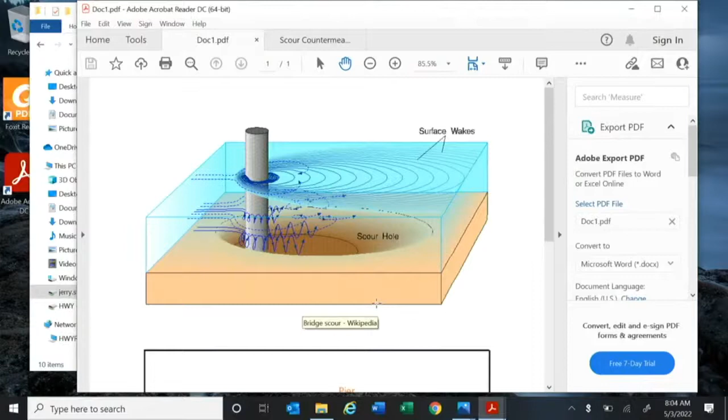Here's a picture of what we consider scour. When we get heavy rains like last night, certain bridges, depending on the soil underneath, when water hits the piers it causes a scour hole. Over time that scour hole gets deeper and deeper, and pretty soon it could actually undermine the bridge. These projects will put riprap all the way around the pier and the abutments to prevent the scour.

I'll show you some pictures here, first the piers. This project has 4 piers, and we're going to riprap probably 10 foot all the way around each pier to protect it, about 3 foot deep. We'll also riprap going up towards the abutments, this column right here, to protect the slopes because there's a lot of erosion happening there.

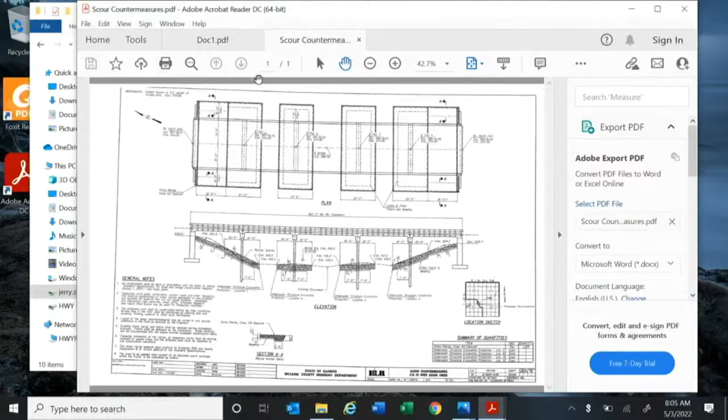Here's some other pictures - this one is from Martin Township.

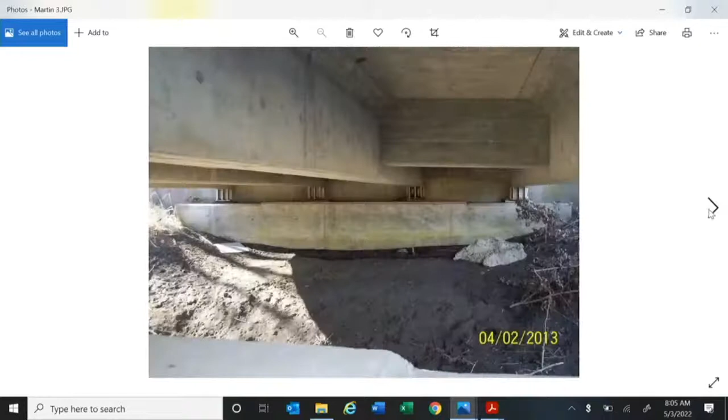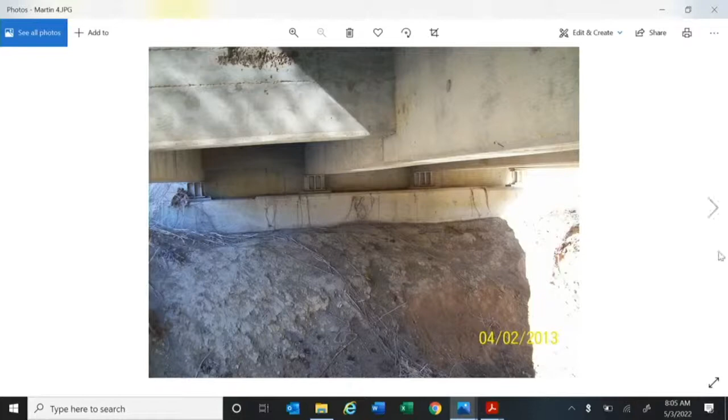So you can see right here, this is where the scour's occurring, behind the abutment and in front. You can kind of see there's scouring on the bank itself, though we're not doing anything with the bank. You can see underneath the abutments it's starting to erode away, and here where this has all been basically cut off. So pretty soon there's not going to be anything left there.

But with the Rebuild Illinois funds, these two townships wanted to use their funds to put these scour countermeasures in place and prevent anything from happening to the bridge itself.

So there's just another picture. This first one was in Martin Township, a little bit north of Colfax. This one here is what they call the Moores Mill Bridge, which is down near McLean. Down that area with Sugar Creek, it's a lot of sandy soils, and that's where we have a lot of issues with scour. We did a bridge on County Highway 59 between Stanford and McLean, upstream from this structure, I want to say around 2010, and we put riprap and scour countermeasures in at that time.

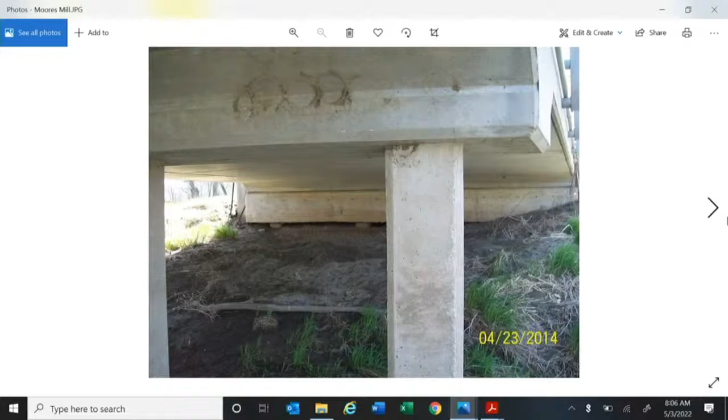And you can see what else causes it. Here's where we have debris that piles up. So the idea is if we get that riprap outside of the piers, then that debris won't build up near as bad as what we're seeing in these pictures here. This was after last year's flood event, I think in June.

So anyway, this is what we're actually approving today: the petitions for the two projects with the townships. These are going to be 50-50 projects, and we're estimating about $200,000 a piece. The road commissioners are going to use most of the Rebuild Illinois funds to pay for their half of the project, and then we'll use our county bridge funds to pay for the other half.

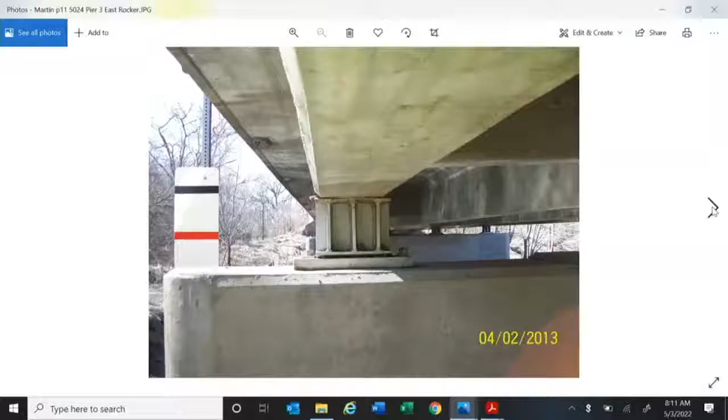I think this one has no date. I just know it was after the flood of last year because we had done that. There's another picture in here, kind of the same, maybe a couple days later, so you can still see. Oh no, that one's 2013.

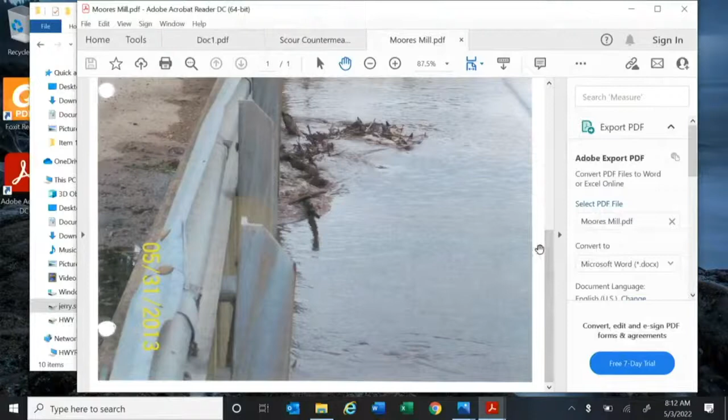I probably do have some other pictures. I don't have them readily available, but I could find them for you and email them to you. That would be great.

The other thing is I noticed there are no weight limit signs posted. I'm quite sure they can't really be enforced out in the rural areas, but is there a weight limit? Are semis going over these bridges, or heavy tractor equipment?

Yes, there's no weight limit on the two bridges themselves, but there are weight limits on the roads, especially during the spring posting periods. There's nothing wrong structurally with these bridges; we're just trying to prevent scour and make sure the bridges stay intact with these projects.

Okay, that's all I wanted to know. Thank you very much. Any questions?

Okay, then we're ready to vote, and again it's both B and C. All those in favor say aye. Opposed? Motion carries. Next item is 5D, request approval of a motor fuel tax resolution for the Stringtown Road, County Highway 32.

Who wants to make that motion? Member Friedrich. Second, Member Klein. All right, Jerry?

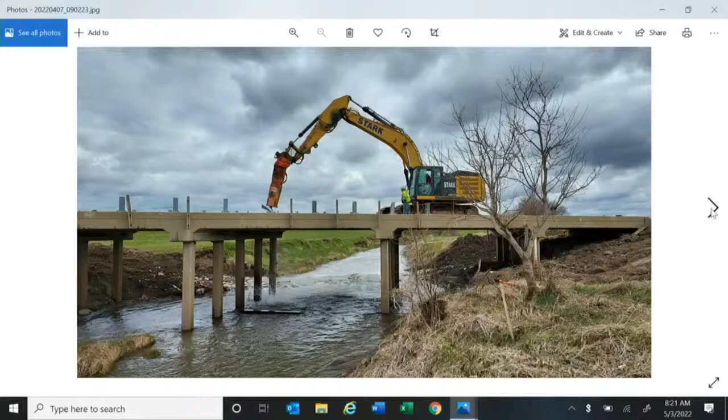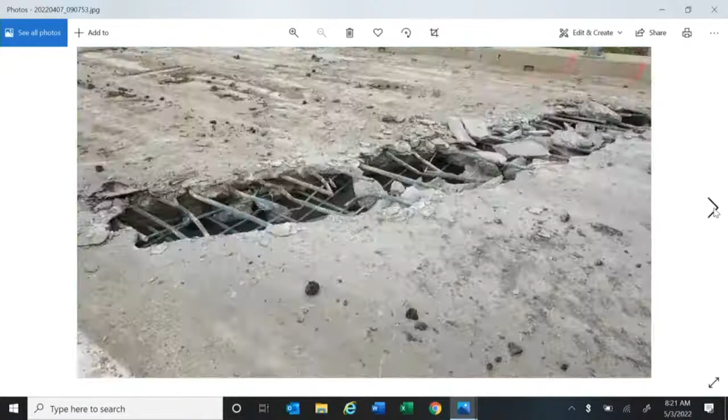This is when they basically just started getting ready to remove the bridge. They got a hi-ho on the bridge with a hammer on the end, and they just start pounding on the bridge and getting it all out of there, or it falls down and they dig it all out after that. You can kind of see the rebar, how much rebar is in there and everything.

So this is another picture of this, of them just hammering. They start in the middle and just kind of work their way back from one side to the other. So there's kind of a bigger picture here of as they're going along.

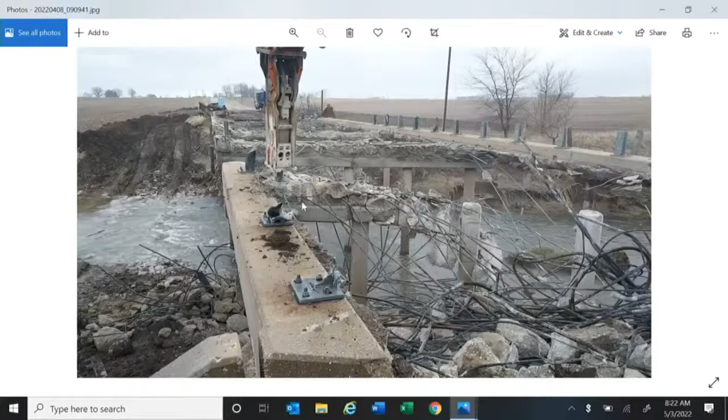And then here is, you can see the bridge is entirely removed, so see all the rebar and everything in there. So then they come back and they get in the channel, and then they take all the piers and the pier caps and everything out. So there's another picture of that.

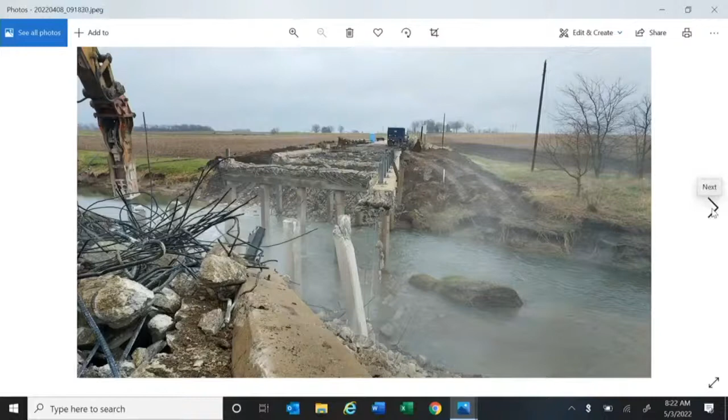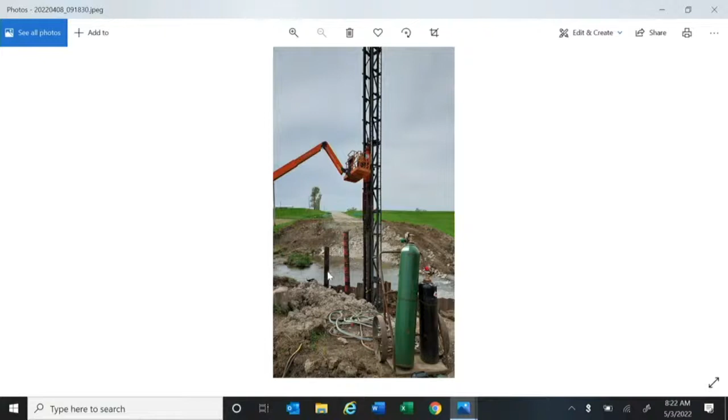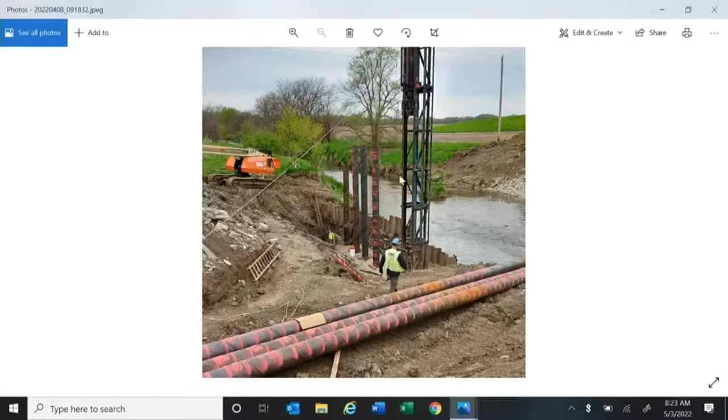But you can see there's been a couple pile that's already been driven there. There's just kind of a picture of the crane that's driving the pile. And here's kind of a better picture, so you can kind of see. So this is a hammer that's driving the pile down, and then here's the pile that have been inserted already. I'll try to zoom in here a little bit.

So these are like 60-foot piles, and they'll probably be cut off somewhere around the 50-foot mark to drive it in there, or after they were driven in there. What we do is the hammer goes up so high, and we count the number of blows it takes to go down a foot, and so then we keep track of that. And then once it gets so far down, or doesn't move, then we say that we've hit bearing, and we've hit basically as far as we could go.

So these are going in about... I think the test pile, you can kind of see right in here where this was like a 60-foot pile, and they had to weld on a 20-foot piece, I believe, and then they pounded it in some more. So that happens from time to time, but it looks like these are 60-footers, so they'll be about right when we cut them off, probably 8 to 10 foot or so.

So with the weather, they haven't really been able to get a lot of decent production. This is on the first pier, and so then they still got to do 2 abutments and the second pier yet to do. So there'll probably still be a few more weeks just driving pile on this structure.

What are they made of? Steel, right. Steel, yeah, I know. It's not solid, it's like hollow. It is hollow, yeah, they're I want to say maybe like 1/2 inch, 3/4 inch thick. So we'll pound them in there, and then we'll put rebar over these, and then encase them in concrete. So like 10, 12 inches diameter, I guess. Yeah, these are 12 inches.

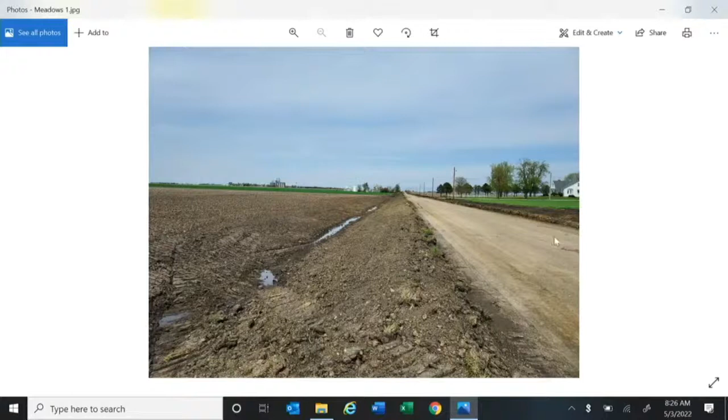So this is the reconstruction project that we're doing, and with all in between all the rains and all the other stuff, the contractor does actually have about a mile worth of the dirt work done as far as the ditches go. You can see here, this is probably about a mile south of Route 24. They've regraded the ditches and started kind of building the core of the road.

They just got some pipe delivered, so they'll start putting in the crossroad pipe. We've trenched around all the culverts to try to find all the field tile that were there, so we can address those as we're putting in the crossroad culverts.

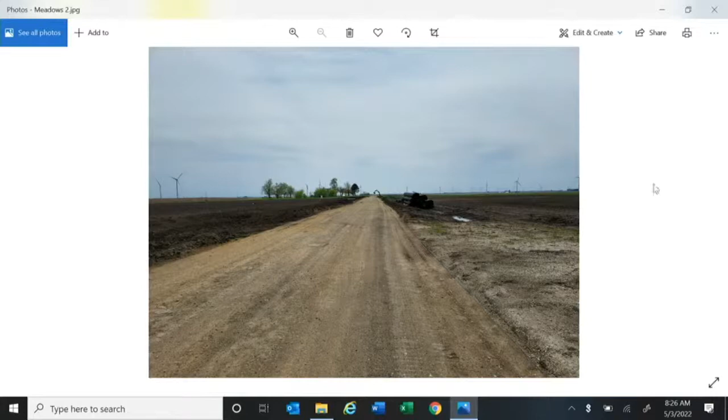This is a 5.5 mile long job. They've milled up about 2.5 miles of the actual road itself. It's pretty hard, there's a few soft spots, but they're basically just running on the old road bed. Here's another picture of the regraded ditch.

Everything got moved out about 10 feet from the original ditch. Just a couple pictures. If they could get more than one day of sunshine, we might be making some headway. They're kind of working in the mud as they go along, but it seems to be moving pretty well.

This is the project we're getting like $4 million from the state for. The governor was here a couple months ago. Yep, this is the Rebuild Illinois funds, $4 million, and then $2.5 million from the Blooming Grove Wind Farm, and then the rest is getting made up with MFT.

Okay, and then the last project is White Oak Road. I don't have anything to show for that. Just letting you know the contractor is Rowe Construction, and they're planning on starting May 16th.